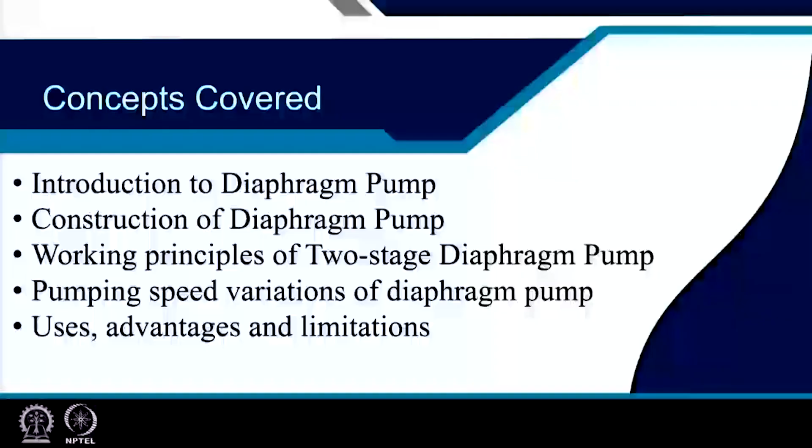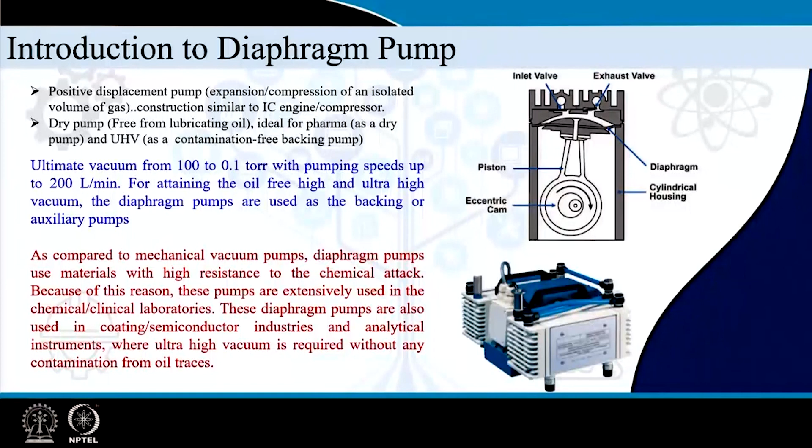So coming to this diaphragm pump, this is a positive displacement pump in a way. And if you look at the figure, it looks like a typical mechanical device: crankshaft, cam, housing, piston, exhaust valve, inlet valve. These are there in IC engines, also in compressors and various other applications that we see in our day-to-day life. It is somewhat like that. It is a mechanical device.

But a similar operation is done here also, slightly different. The same volume is exposed to the inlet valve for some time, and the same volume is exposed to the outlet valve some time, like our IC engine type. Whereas in the rotary vane pump, the sweeping volumes, the inlet volume, that is the expanding volume, and the compressing volume are three different. Here it is slightly different.

And the second point is, this is a dry pump. Dry pump means free from lubricating oil, ideal for pharma applications. At that time we use the pump as a dry pump. It is also ideal for ultra high vacuum applications. There we are not talking of it as a process pump. Process pump means it is doing the main duty of evacuation needed at the pressure at which the process is going on. Whereas high vacuum requires a dry pump of this sort in a different application. It is backing another, more complicated, high-tech dry pump, that is the turbomolecular pump.

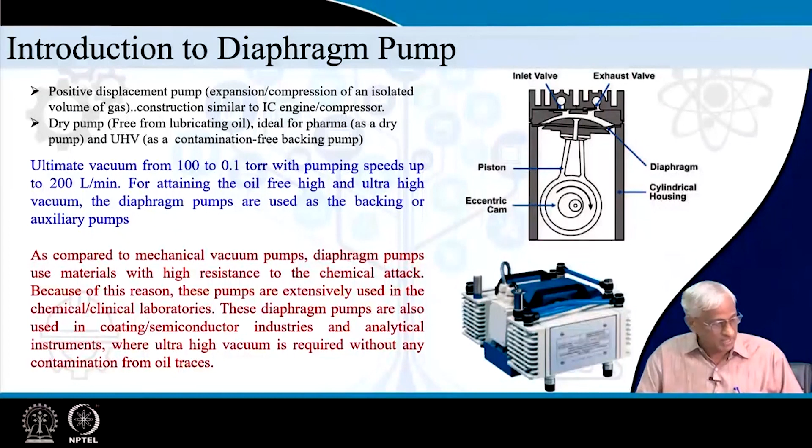So, what is the construction? Like any pump, first you try to understand construction. You can see on the left side, it contains a diaphragm, okay, it is here. So, this contains a diaphragm clamped here, diaphragm clamping with the housing and the piston connecting rod here, and this piston is connected to an eccentric cam attached to a shaft which is attached to a motor.

I need not explain this further because any engineer can easily understand. It is an axial thing here. This is the central axis and the cam is eccentrically situated. So, when the shaft rotates, because it is coupled to the motor, there will be some sort of orbiting type of motion of this cam. Once it is orbiting, this connecting rod will have a rocky but linear motion.

That means, it will go up and down, at the same time it will be rocky left and right. A rocky linear motion I call it, you can call it any way, and this moves the diaphragm up and down and little tilted this side or tilted that side. Depending on whether you are sucking, then it is preferable to make it nearer to the inlet valve. This is my inlet valve, and if it is exhausting, this is my exhaust valve.

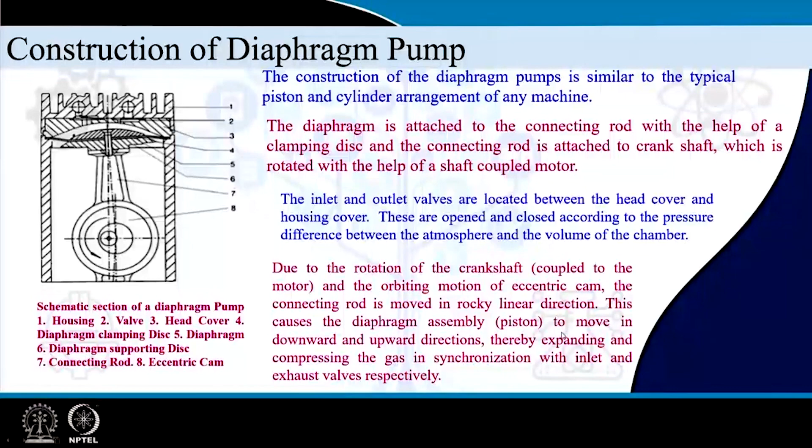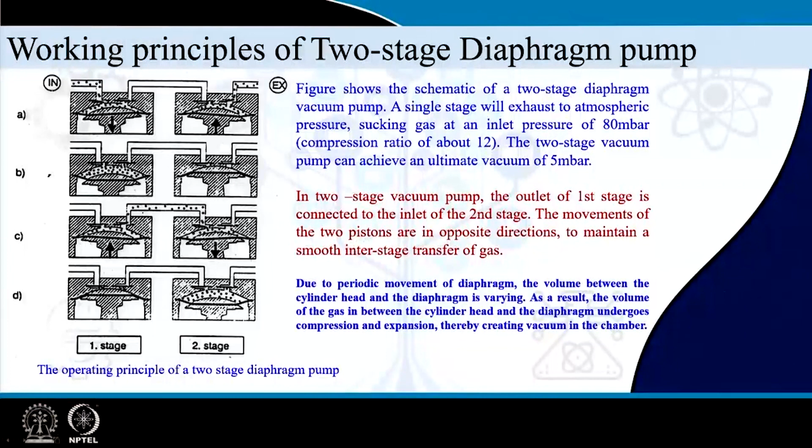And how is this compression and expansion taking place? If you look at the figure, the expansion and compression is taking place because of up and down motion of the piston, that we will see now. Look at the figure. Concentrate on one stage, basically it is a two-stage compressor sort of thing, because it is also compressing from a vacuum level all the way to atmosphere.

This is my first stage, an identical second stage will be there. These two are connected by an interconnecting pipe, and finally it is exhausted to atmosphere. Mind you, this does not require any other helping hand to exhaust to atmosphere, it can directly exhaust. A single stage cannot create very good vacuum level, but if you are interested in 200 millibar, you can use single, otherwise you will have to use double.

When you are using double stage, you should see that the exhaust of the first stage is connected to the inlet of the other stage. So, while this piston is moving down, the other piston should go up. They can be connected to a common shaft with various couplings, you know how it is done in a typical engine used in automobiles. So, you can easily generate that type of motion. Now, concentrate. This is a two-stage pump.

The inlet valve is slightly opened and the gas from the chamber of your interest, whether it is a chemical reactor or the backing of a turbomolecular pump, or initially bypassing and evacuating a chamber using a dry pump up to 1 torr, that gas is coming here. The inlet valve is opened because of pressure difference, because this piston is going down. So, there is a partial vacuum created.

So, the valve, it is just another diaphragm, a small leaf seal, opens because of pressure difference and molecules start getting sucked here. And when the pressure difference is very small compared to this bending, then what will happen? The valve closes. That is called the isolated volume.

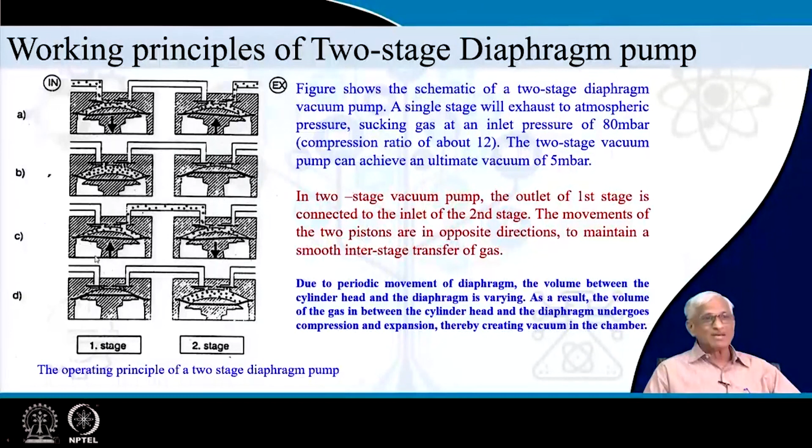When you try to do it, the principle is simple, but the materials are fiber reinforced composites of typical structure, compatible to vacuum, and even after lakhs of cycles they will not get torn; that springy action will be there in the walls. Similarly, in spite of several motions and also rocking motion, the diaphragm will not get punctured. That is the beauty of it.

So, at the inlet port of the first stage, when the piston is coming down, this volume is connected to the inlet port and starts collecting the gas molecules. After that, the inlet valve is closed, the exhaust valve is also closed, then you compress it. I am telling this again and again, because once you are clear with this constructional aspect and action, you will understand that I am compressing only very small volumes. So, the pumping speed is very little, but it is a dry vacuum.

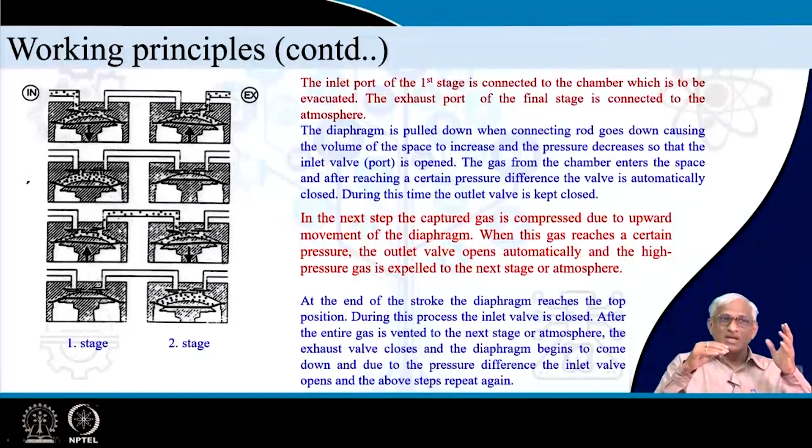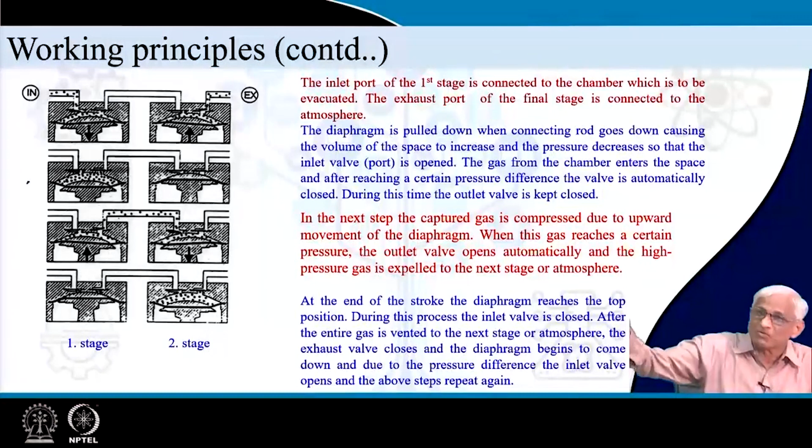So, you have to capture the gas during the downward motion of the piston, isolate the gas, then compress it, in synchronization with the inlet and exhaust valves. When opening, exactly at that pressure, the pressure difference is such that the forces open the inlet and exhaust valves, and when the exhaust valve of this stage is opened, the other valve is closed; when this is closed, that is opened. This mutual exclusiveness of first stage, second stage, or for the same stage inlet and exhaust, has to be worked out properly, and suitable materials have to be chosen.

In the long run, the reliability of the materials is very important, and it is worth doing, because we are getting a dry vacuum right from 1000 millibar to 0.1 millibar; 99.99% is removed without any oil lubrication in the working volume. In the rotary pump, in the working volume, there is lubrication. So, you should understand it like that.

You can look at the figure, a sort of animation is there. The inlet valve is opened, molecules are coming, and again the diaphragm is going up, volume is reducing, pressure is increasing, the exhaust valve is opened, and that exhaust can be connected to the inlet of another pump. It can produce only 10 millibar or so. Compression ratios are not much, but with 2 stages maybe you can go up to maximum 1 millibar or 0.5 millibar.

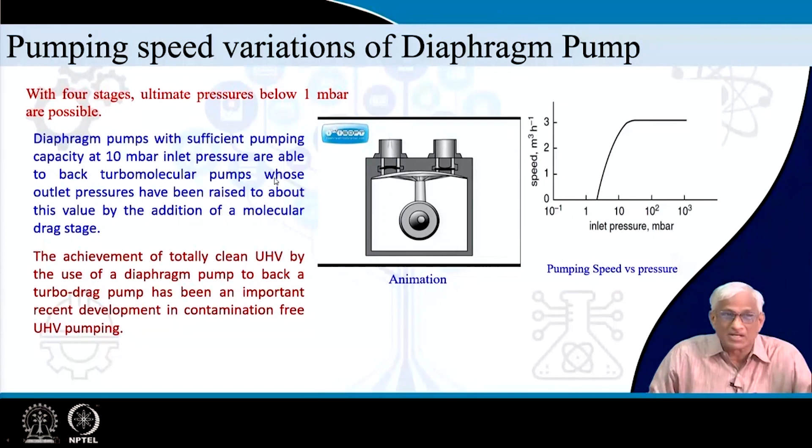But they are ideal for UHV applications. They are also ideal for molecular distillation or wherever contamination is not allowed. They are ideal for semiconductor applications. No impurities are allowed. Who knows, some of these hydrocarbons may make the device P type or N type. We have to add parts per million impurities in an intentional, calculated way, not in a spurious way.

So, the hydrocarbons will act like a contamination which will affect the quality of the device. It will also affect the quality of drugs as well as even the food items. We cannot accept hydrocarbon or oily smell even if it is a very small quantity.

Okay. So, pumping speed is shown here with inlet pressure; it drops heavily by 1 millibar. So, most of these pumps are ideal for 10 millibar. If you want to make a good backing pump to a turbomolecular pump, there must be an additional stage of turbo drag pump, so that whatever is the typical exhaust of a turbomolecular pump, 10 power minus 1, will be further dragged to bring it to 5 millibar or so.

Around 5 millibar there is a finite pumping speed of this diaphragm pump. Sometimes people say dry membrane pump. So, that way there will be continuous matching of the backing of the turbo pump to the front side suction of the ultra high vacuum chamber meant for semiconductor applications or X-ray tube applications or plasma applications, fusion applications or space technology applications or even metallurgical things, etc.

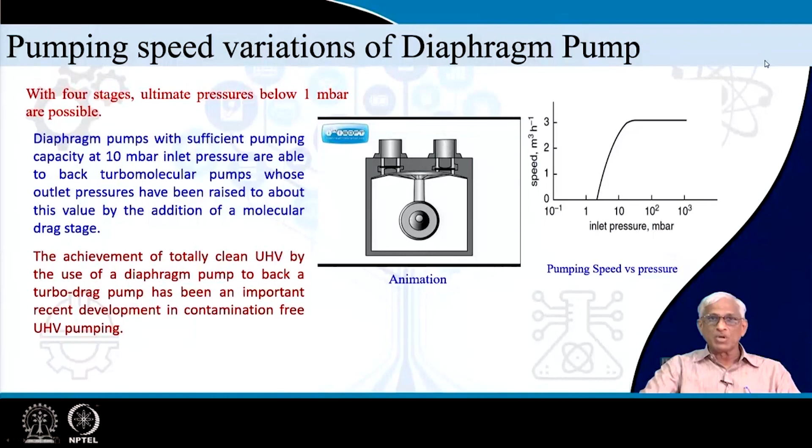Okay. Molecular distillation. So, this is how the pumping speed variations of a typical diaphragm pump look like, and this is a ready made unit. Inside there will be a diaphragm pump, and it is typically used for medical and pharmaceutical applications mainly, where you can use it for drying, distillation, filtration, etc.

And as I have often been telling you in this class, the real application of these diaphragm pumps is initially for backing of the turbo pumps, and parallelly they have got a lot of applications in pharmaceutical sectors where oil traces are not allowed. But there are other competitors like scroll pump, etc. for backing applications nowadays, and there are other pumps like claw pumps and screw pumps. They are also dry pumps, and they compete with these pumps in the form of huge pumping speed.

They can also produce 0.1 torr without any oil traces. If necessary, they can produce a little better vacuum using a booster, but their pumping capacities are quite high. So, that way they can be used in pharmaceutical sectors where dryness is required. Dryness should not be confused for water free; it is lubrication oil free.

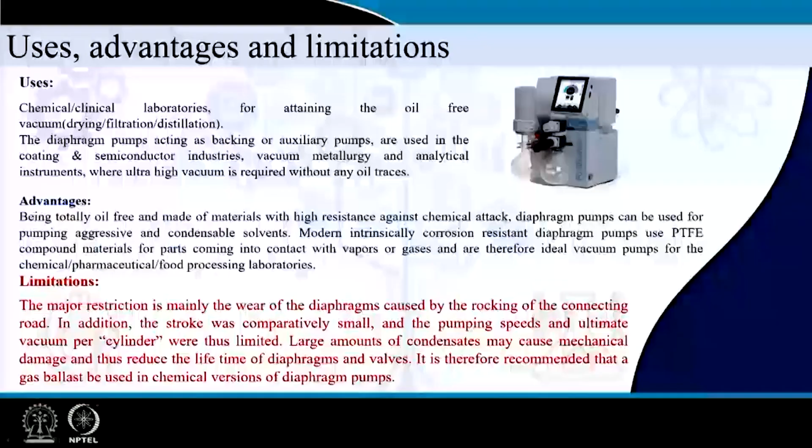We may use it even to suck water vapors, but we have to see that the pressure conditions are such that inside the pumping chamber it has not reached the saturation pressure. So, saturation temperatures even with heating effects or whatever goes on inside, so that two phase is not there, and water vapors coming from the reactor go all the way to the exhaust. Such precautions have to be taken. Okay. So, they are ideal for dry applications in pharmaceutical sectors where oil free vacuum is required.

Okay. You can go through these advantages, and some limitations always will be there. What are the limitations? This diaphragm is exposed to mechanical fatigue after some time, but that should happen once in a year. If every now and then you have to change these diaphragms and you are not an expert in that, downtime will be more. This is exactly the problem these diaphragm pumps are facing.

That people are trying to overcome, because there is a lot of research going on in composite materials which are used as seals and diaphragms, which can withstand a lot of cycles. That way, material research and optimization, properly designing and using it for a particular high-tech application, making a cost-effective analysis of it, and competing with the other dry pumps. So, it goes on in the subject.

So, the first pump we have completed today, a diaphragm pump, which is a dry vacuum pump. Next we will see claw pump, that is also a dry pump. Later we will see screw pump, and at the end we will see scroll pump. And then we go again to dry pumps, but that time they are dry high and ultra high vacuum pumps, called turbo pumps and cryo pumps.

So, now onwards we are not only going towards high and ultra high vacuum, we are also going into clean and cleaner technologies, because high tech technology quantitatively wants very low molecular density, fine, but qualitatively also wants a certain chemical signature of that residual gas. So, there will be residual gas analyzers continuously monitoring what is coming from the pump, what is coming from the process, whether it is acceptable or not.

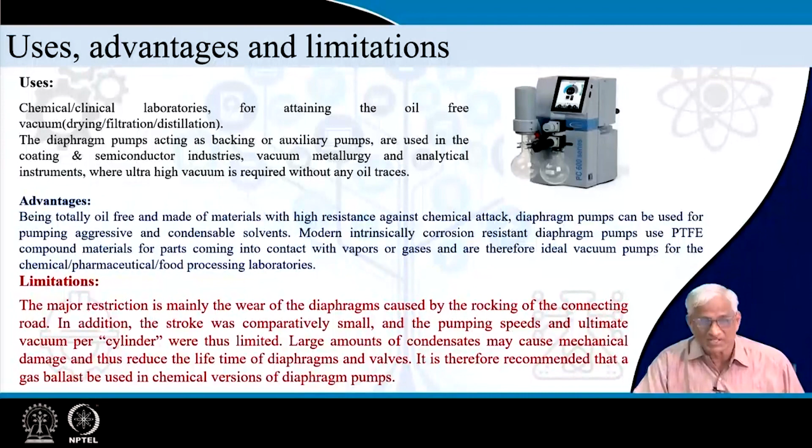So, with this let us conclude this diaphragm pump, the starting point of dry vacuum technology in the medium vacuum level. Thank you very much.